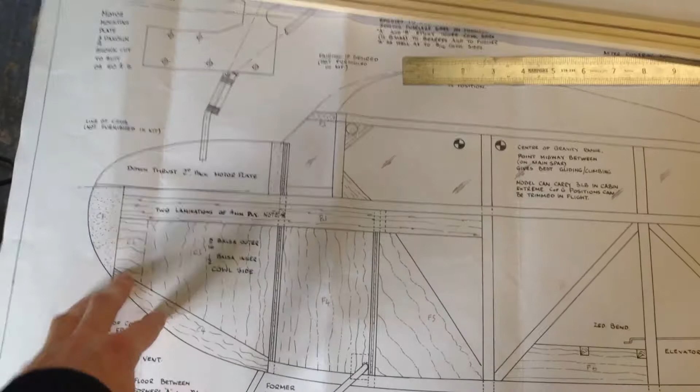Now I'm on the fuselage. The fuselage I'm going to try and document quite a bit better than I did the tailplane, but I've noticed we are already going to have a couple of problems in this area. One being we are missing this part. That's not a problem, I can make one quite easily. Two, none of the pre-cut parts fit at all. They are all going to need some form of doctoring to fit what the plan says they should be.

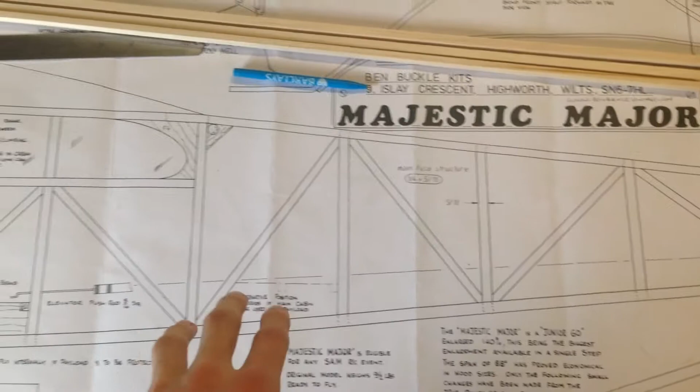So I'm going to cut out a few basic parts and find a way to get them stuck down perfectly, because on the fuselage it needs to be perfectly flat, and obviously you're building two of these fuselage panels, one for each side of the fuselage, so it needs to be smack on. So yeah, I'll cut a few pieces out and file them and show you how it should go together, and hopefully you'll get an idea of how the fuselage went together.

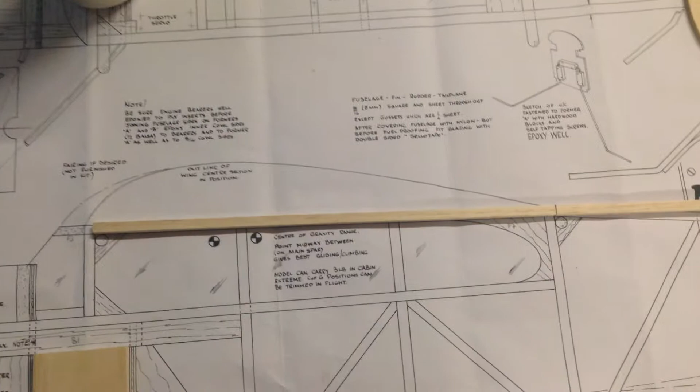So what you need to do here is take your stick of 1/4 by 5/16 balsa wood, place it on the plan where it needs to be, and then mark with a pen or pencil where you need the cut to be. I prefer pen because pencil just crushes it before it leaves a mark. Here it needs to be cut because it's not a straight line on the fuse. It has to crank here.

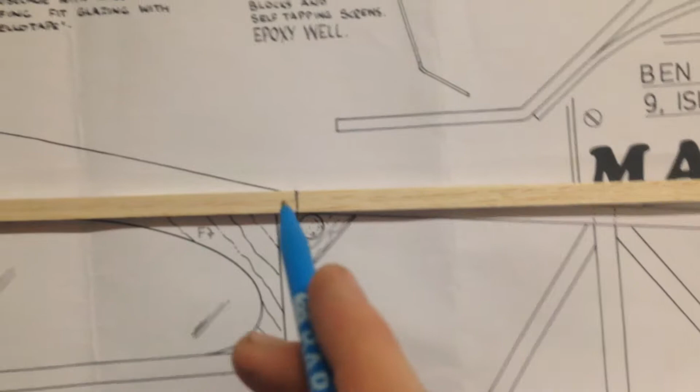Then once you've marked your piece out, you want to either get a firm hold of the stick or grip it gently in a rubber vise. This does crush extremely easily. It's just important that you've got a firm grip on it and you can cut it 90 degrees to where you've marked perfectly. So once you've cut it to roughly the right length and then filed it to a nice finish and also the perfect length, you can cut another piece out, do exactly the same as you did with this piece, and glue it together here.

I know it looks like a botched joint, but it's actually quite a good joint. It's just 1/4 by 5/16. It's not a square; this way it's 5/16, that way it's 1/4, so you end up with a little step here. This is going to be on the inside of the fuselage, so it'll look good from the outside still.

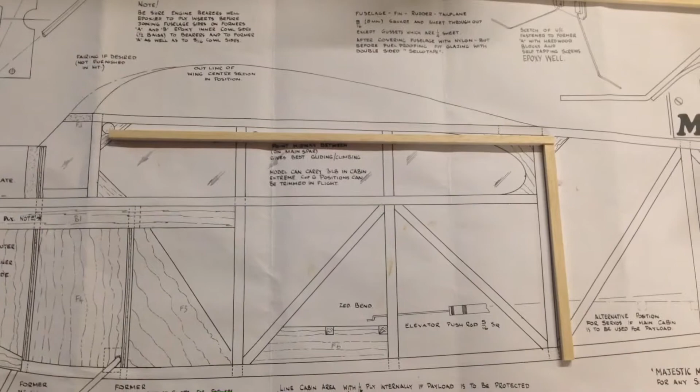And the reason it's been designed like this is to make the fuselage lighter, because what they found was with the long tail and a short nose, more weight in the tail means it's going to end up tail heavy, and you really don't want a tail heavy model. So that's pretty much all you do. And now I've got to do the rest of the fuselage, and then I've got to build two of them.

Okay, so this is what I've got so far. Unfortunately, after the last video the timer stopped. I'm not quite sure why. I definitely didn't stop it, but I can tell you that it took about 45 minutes to an hour to get from what you saw in the last little clip to this. And I haven't sanded down any of the joints or filed anything yet, apart from making the joints fit properly.

But what I'm going to do now is, obviously there's these cross members here to stiffen the airframe, but there are also little gussets here and here, and I'm going to put those in now, because as I'm working on this panel here, there's a little bit of a torsion effect on the joints that are already there, and they seem to want to break, and it just makes the job a little bit more difficult and a little bit slapstick in a way.

So what I'm going to do now is just put the gussets in, just these two here and this one and maybe this piece here. I'm going to put all these vertical members in before I put the cross members in. So yeah, that's what I'm going to do now, and I'm going to see if it helps.